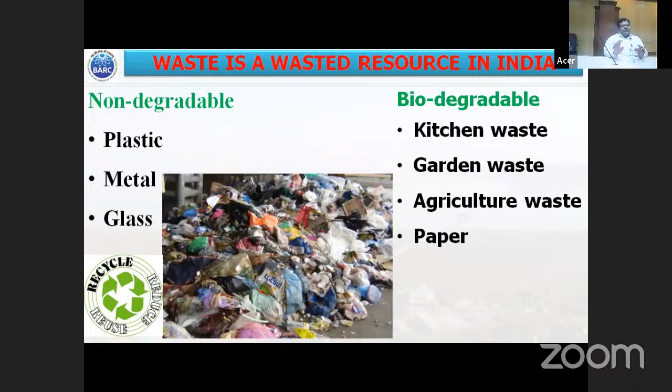Just some statistics, but you don't have to worry much. Roughly it is said that in a family of 4 members, like 2 kids and 4-5 people total, usually in our home mostly 0.5 to 1 kg waste is generated every day.

So in that 1 kg, 50% is called biodegradable. You have some plastic, or clothes, or paper. But whatever food waste, like remaining food, vegetables, and whatever peels or that part is there, that is your waste.

So that much is roughly available, and if you calculate throughout India, it is very huge, like 55 million tons of waste is generated every year. And this is not going to stop. Your waste will keep increasing also, at the quantum of 5% every year. And you have to remember that 50% is your biodegradable waste.

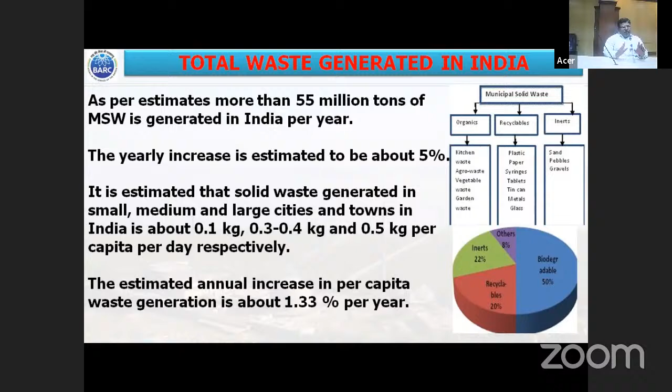So this is a very huge amount of waste. Now our aim is to reduce that waste. So what are the options available? What are the different methods available? We will highlight the commonly used methods.

But now, like the last 4-5 years, that dumping has been banned actually. So that is not allowed now, because that is creating a problem. Because when you are dumping the waste, a large amount of gases are released from there, mostly methane, carbon dioxide, carbon monoxide.

And when the waste is dumped, that methane catches fire during high summer and all this. So that extra gas pollutes your environment. Landfill is now banned, but still some people are there playing mischief, putting the waste onto the road.

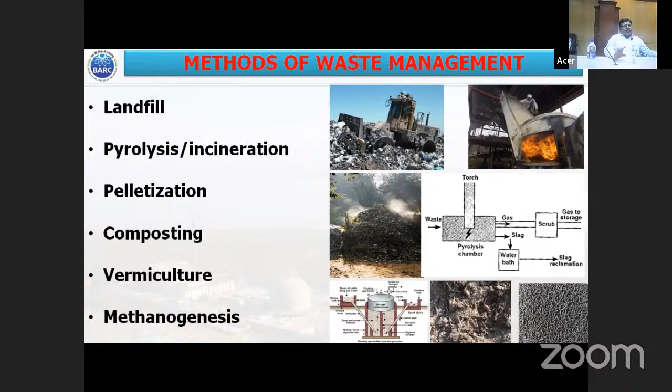Plants make food by taking sunlight and nutrients from the soil, and we use that food. Whatever waste remains goes back to the soil. The plant also, when it dies, goes to the soil. So there is a cycle going on in the earth, and that cycle should not be broken.

So your process should be environment friendly, an eco-friendly process. That is called eco. So the elemental cycle has to be maintained, and that is called recycling.

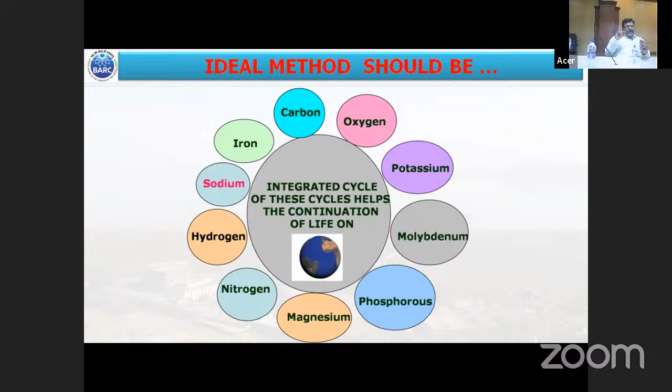So this is the aim of the process. This is the technology we have developed, called Nisargruna. Nisargruna is a word made up of Nisarga and Runa. Runa means loan in Sanskrit, and Nisarga means nature. So whatever waste is there, we are taking so many things from nature in the form of a loan.

If we take a loan from the bank, we have to pay it back, isn't it? But in nature, we are not giving anything back. Then how will it maintain itself? Our aim is that you process the waste through this plant, and whatever manure comes out goes back into the field. So you are paying back nature's loan. This is how the concept evolved.

So Nisargruna is nature's loan. You are processing the waste into this biogas plant, and whatever gas is produced, you use it, and the manure is applied to the field. So you are paying back nature. That's why it's named Nisargruna.

Nisargruna is nature's loan. It processes hotel waste, municipal waste, agriculture waste, vegetable market waste, and abattoir waste also. So all types of biodegradable waste can be processed. Let me explain how it works. Don't worry, it looks complicated, but it's simple.

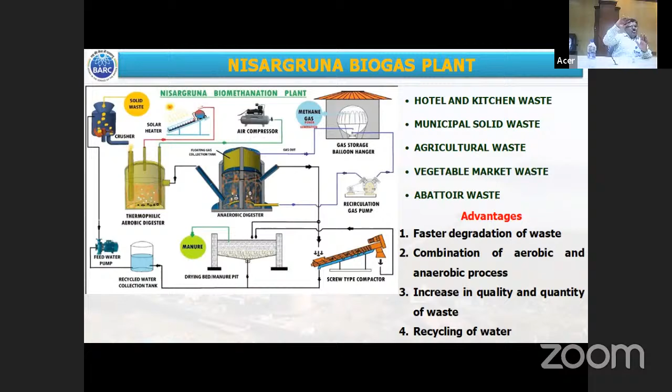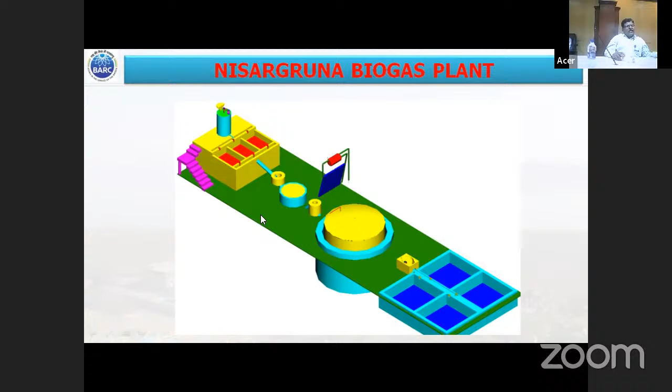So this is the process actually. These plants look like this. See, the digesters are below ground - pre-digester, main digester, then manure pits, solar dryer, solar heater, your mixer, and all these things. So this is how the plant looks, below ground. We have a plant just near the training school hostel in Anushakti Nagar.

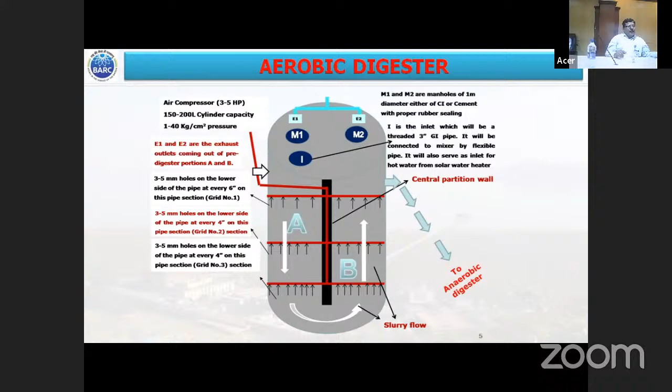Some students might be there from Anushakti Nagar colony. So there is a plant just behind the training school hostel. So this is the aerobic digester, then anaerobic digester, then manure pits. We don't have to go there.

So how this natural balance works - I told you any system should have a natural balance. Plants produce food, they fix CO2, they take CO2 from the atmosphere, then sunlight and nutrients from water, and they make food. That food is used, like ourselves also, we eat that food, and whatever waste is generated, through our Nisargruna technology, it is converted to methane. So this methane, when you burn it, gives CO2, and that again goes to the plant, which will use that CO2. This is how the process is. That is called natural balance being maintained.

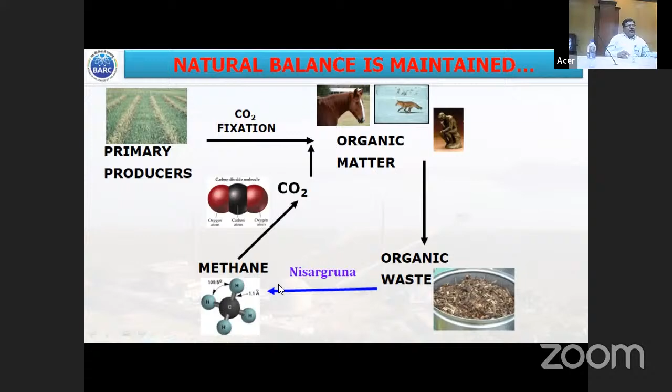But what happens when you are not following this method - suppose whatever waste is there, you put it into the landfill or onto the road, what will happen? Whatever methane is there will directly go into the atmosphere. So that is not a natural balance. Natural balance is that methane has to be burned and then converted this way.

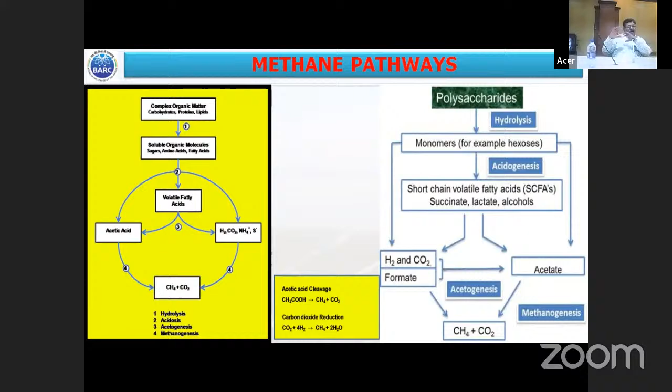How methane is generated, there are different pathways, but I will not go into details. I'll just mention that your waste is converted into methane through different reactions. Different bacteria are also involved, like the aerobic bacteria I told you, anaerobic bacteria. They are very microscopic - you cannot see them by naked eye. You need a microscope to see these bacteria.

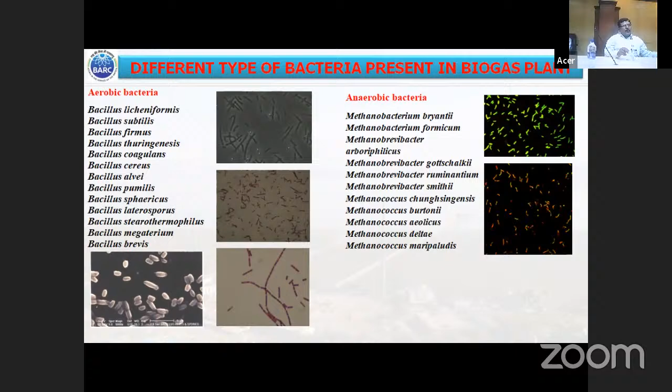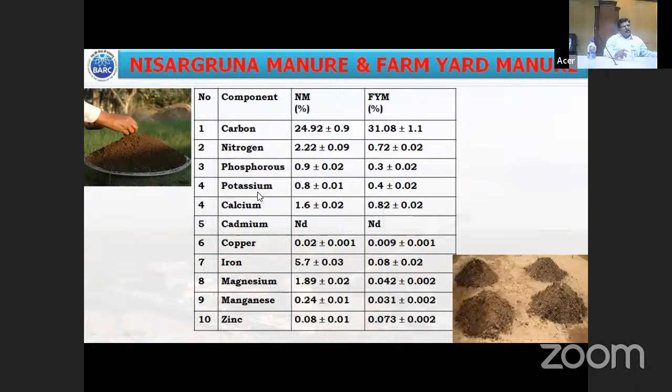And then manure, as I told you, is used for different applications. We have analyzed the contents of this manure and found it has very good content. When you apply this manure into the field, it increases the carbon content of the soil, meaning it makes the soil more fertile - soil fertility is increased.

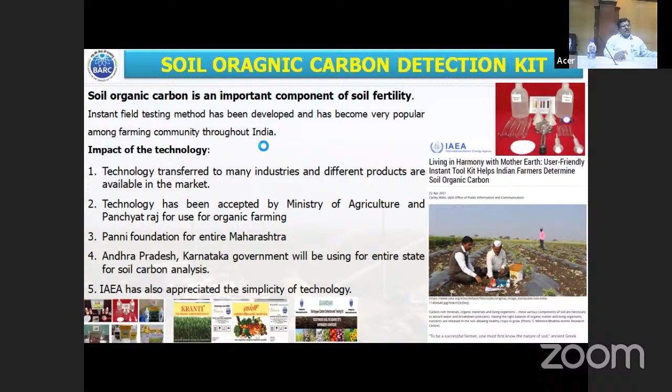We have another technology for detection of this soil carbon, which I have mentioned here. That soil carbon kit is used in many places by farmers and others for analysis of their soil.

Now coming back to the Nisargruna technology, I'll share some success stories. We have seen what the technology is, what the waste problem is, what options are available for treating the waste, and how we developed the Nisargruna technology, which has been implemented across the country. Now I will share some success stories of this technology.

The first example is gas used for a community kitchen in a small village near Coimbatore. Low income group people bring the waste through a cart, it is processed into the plant, and there is a community kitchen with some 10-15 stoves. Morning and evening they start it, so that people come there, cook their food, and go back.

Not all, but some people cook or boil water, or cook rice with it, so they are saving their part of the gas. This is a very good example where this technology is used for community kitchen purposes.

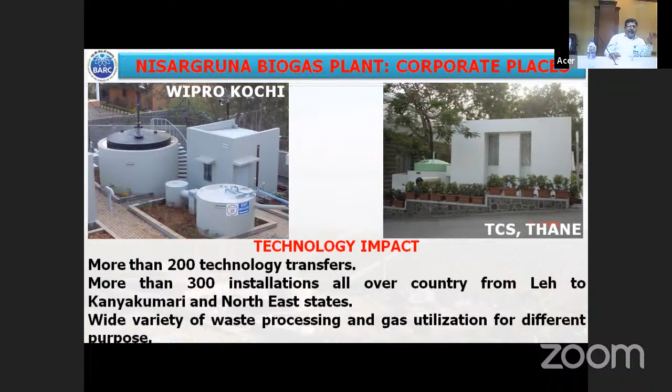All types of waste, all types of biodegradable material, as I told you initially, different types of biodegradable waste can be processed in this plant. Now, in the last 3-4 years, we observed there is demand for small capacity plants, like for small housing societies or restaurants that cannot afford bigger capacity plants, or don't have the space. In Mumbai, there is a crunch of space, so they requested us to develop a small capacity plant.

So recently we have developed a plant made up of PVC pipes, useful for housing societies, restaurants, and similar places. This is an above-ground plant that can process 10 kg, 20 kg, 25 kg, customized to any amount of waste. We can change the dimensions of the PVC pipes, and different types of designs are possible.

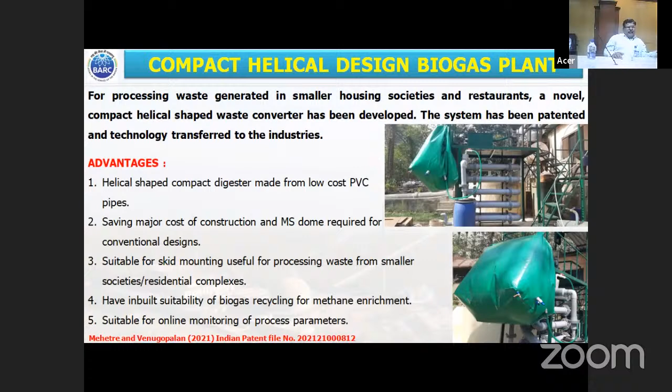So all that cost involved in construction, the MS dome and all these things, is saved in this plant. And it's very good for monitoring process parameters. This technology has been patented actually. Dr. Venugopalan sir is also involved in this work, and it has been patented. We have transferred this to different industries also, and they have taken it up to different establishments. So this is how the technology is spreading to different places.

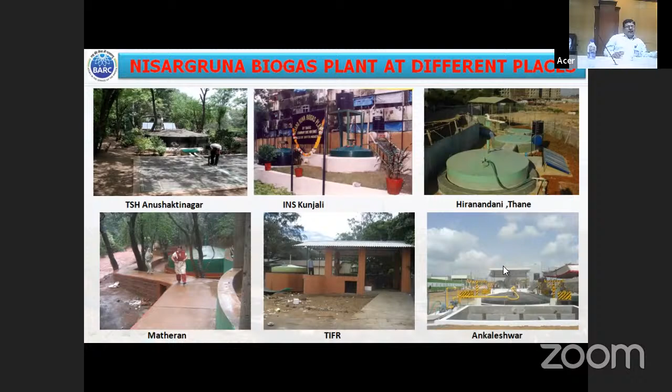Some examples are there, like this is the plant I was mentioning about, the training school hostel backside. Now there is a lot of improvement in the design. Training school hostel, INS Kunjali, this is in Mumbai only. Hiranandani Thane, Matheran I mentioned, TIFR. Then this is in Gujarat. Plant is there, then different locations all over the country. This plant is functioning very well actually.

So we are playing a major role in the Swachhata related activities, and when the Government of India launched the Swachh Bharat Abhiyan, from that time we are playing a very important role in making this plant. When this technology was transferred to industries, most of the places wherever Swachh Bharat Abhiyan is going on, these plants are there. So we are playing a major role in converting waste to very useful products, and cutting down the waste available in the cities.

This is how I want to show how research can be converted into useful technology, and technology having applications in the field. So this is the small presentation. We welcome you. Whatever doubts you have, you can put into the chat box, and we'll try to address them. Now we'll go to any doubts that are there, or we can share this.